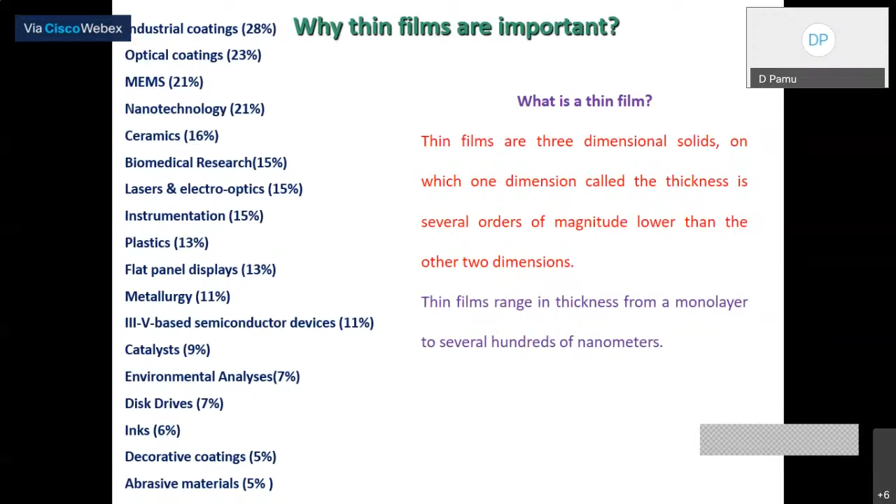So I am just giving the general statistics, the importance of thin film technology being used in various technologies. So that is where this has gotten very much importance. I just want to give generalized applications, and then I will go into the importance of how we deposit thin films, and then if time permits we will also see how to characterize the thin films.

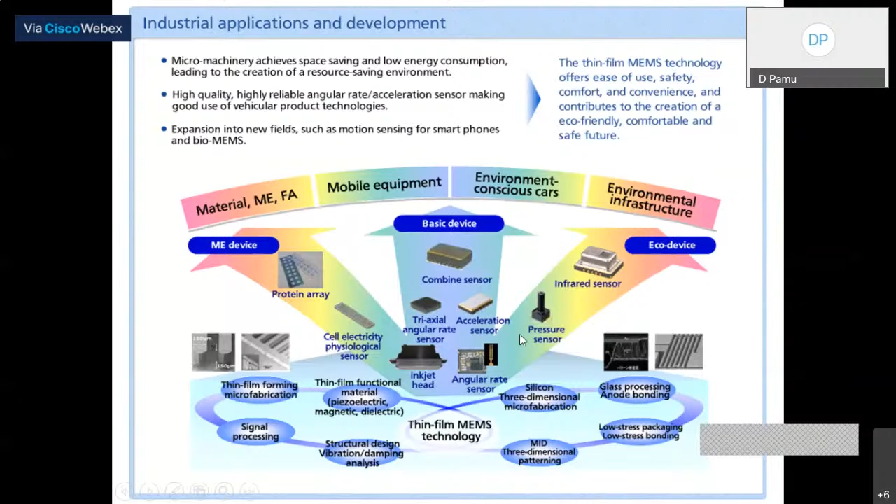So the MEMS structures is one of the smart technologies that is coming up, where the device size is much smaller. In this part, we see that thin films are very much evident in fabricating all the applications shown on the screen.

We know that in every part of an electronic device, whether it is packaging or smaller size devices which are very much compatible with the semiconductor industry, that is where these thin films are very much used in the technological aspect.

Even layers and all this, in every case we see a thin layer of it. Sometimes you may not directly deposit a film, but you will slice a thin layer of plastic and put it up. That is the commercial application of it.

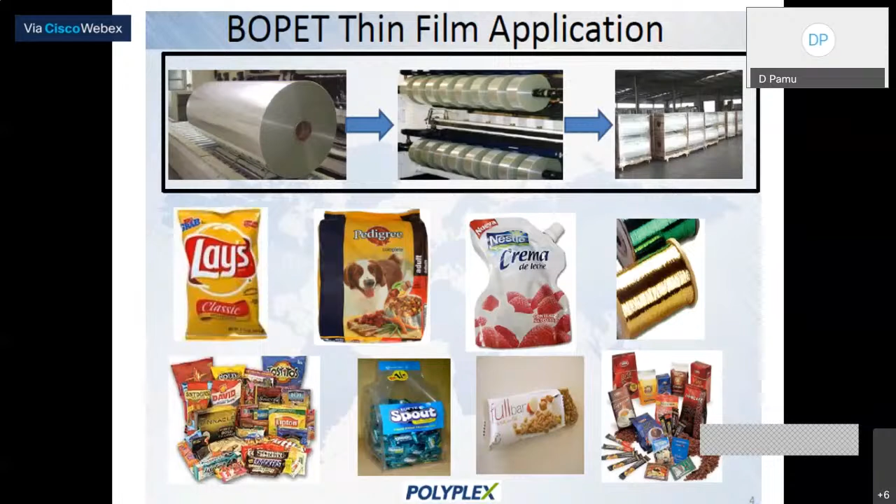And then we will also move on. In the aeronautical industry, or whether turbines or telecommunications, we see that thin film technology is very vital. Why it is vital is that it is very easy to protect the device from environmental aspects, which is not possible with most of the other nanotechnological methods and nanomaterial synthesis methods that we use.

Now we know that even companies started transparent screen TVs, where when you switch on the TV only, you will see the screen, otherwise it is transparent. Why that is happening is that this is again transparent oxides being used, and the coatings where you will see 100% transmittance of the light.

And now we are moving on to flexible devices, where again a thin layer of the material that we are interested in is deposited on the device and we are able to use it effectively. So these are some of the applications, and we know various aspects of it are coming.

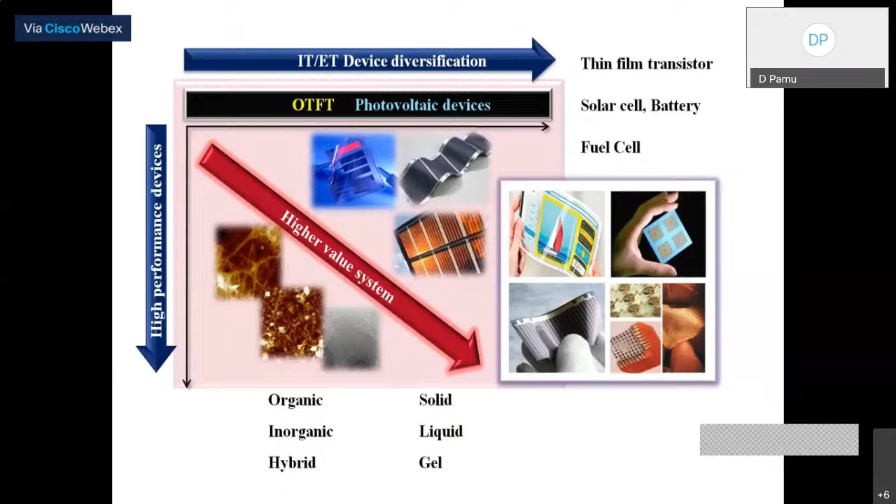This is one example of that, and again you can have MEMS structures on different flexible substrates, so that it is not rigid, but you will be able to tune or bend the device according to your requirement. This will allow the thin film, because the thickness is so small, to not distort the structure of the material itself. So that is the advantage that we have.

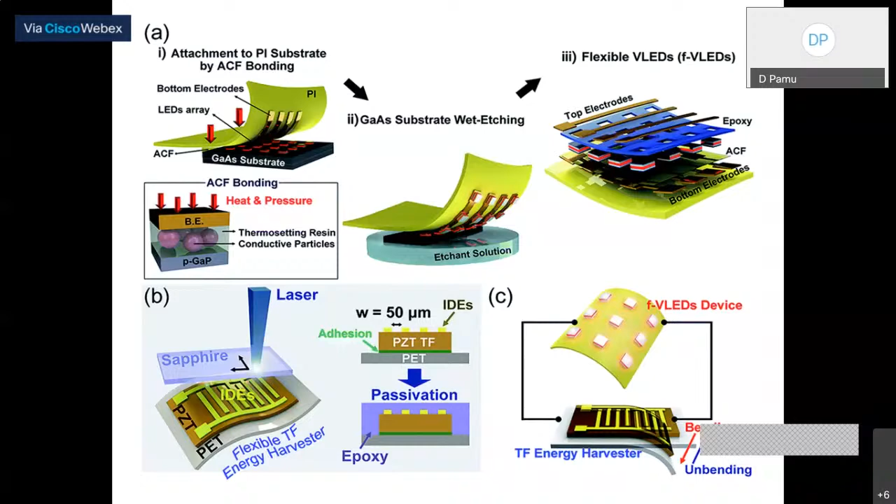We also know that solar panels and all that can be made even lighter, so the entire house can be covered. In Kerala and other places they build with solar panels, so that you don't need extra electricity connections. That is possible because these solar panels have become very thin due to thin film technology.

This is mostly due to electronic devices such as mobiles or tablets and other electronic computer devices. Due to that, thin film technology has gone up so much.

So these are the applications. But how do I do thin films? The industry seems very promising, but how do I do a thin film? How do I deposit a thin film? What is the method that we follow? That is what we are going to see from now on.

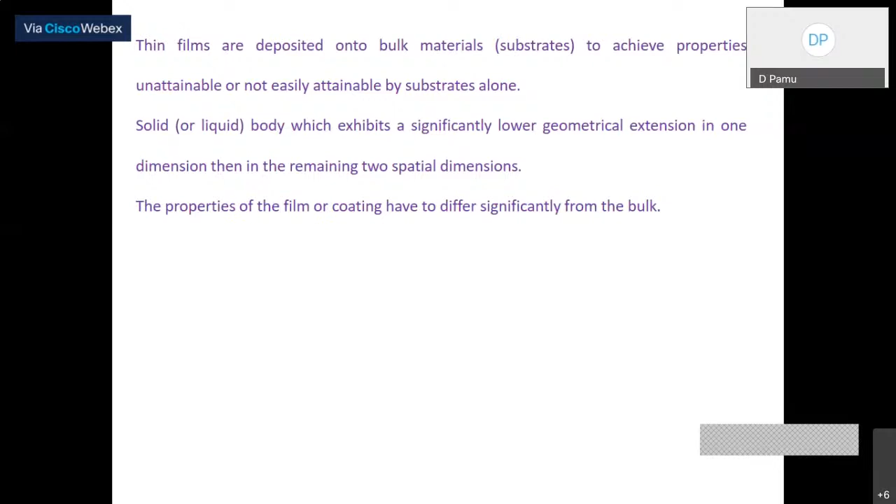So now what we are basically going to do is a layer by layer process, and initially you vaporize it and again condense it onto a substrate. That is what happens in the case of physical vapor deposition. Anyway, I will come to that.

As we move on, you will be able to distinguish between a thin film and a thick film. As I told you, for somebody thin is very thin, for somebody thick is very thick. So whatever is your need, you have to choose.

So why we call thin films is that a film is considered thin when its properties are significantly different from its bulk. Why is it so? Because of the large surface to volume ratio, that is the main thing. That is what probably yesterday also you would have heard when we were talking about nanotechnology.

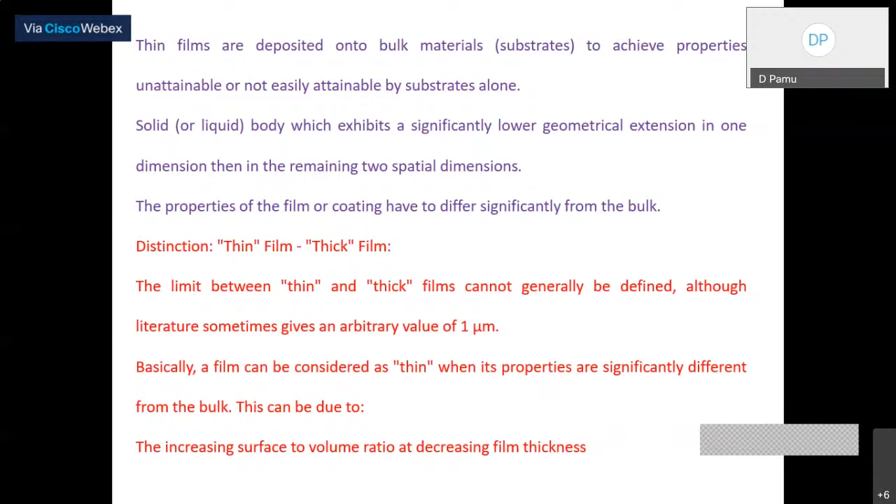In the gaseous state, we have methods called CVD, that is chemical vapor deposition technology, PVD, physical vapor deposition technology, and IBAD, ion beam assisted deposition. In this case, what happens is initially you start with the solid and vaporize it, then bring it to the substrate and condense it. That is what is called the gaseous state method.

Solution state method means that sol-gel process is one of the best examples. That means you make a solution of the material that you want to deposit on a particular surface, and then you dip your substrate, or you put a layer of it. That is called the solution method.

And molten or semi-molten is thermal spraying, welding, of course laser welding. All these come under the semi-molten state or molten state techniques.

But however, today my interest will be more on the gaseous state, because this is precisely required for various applications. I am not underestimating the other techniques, because my focus and my expertise is only on PVD or the gaseous state methods. However, solution based methods are also equally important when you start working on it.

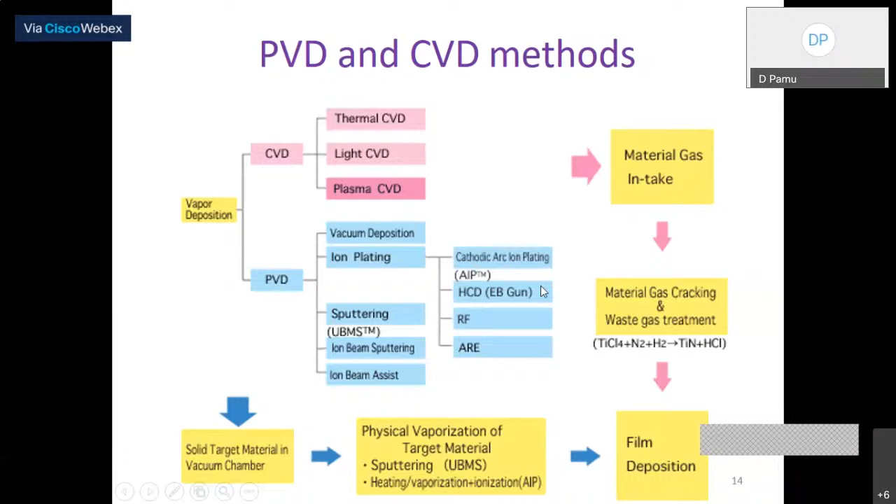Of course, I will also enhance further. Let me distinguish, this is the crucial slide, and based on this, later I will go a bit in a diverse way. So what are the factors that distinguish PVD and CVD?

Reliance on solid or molten sources, as opposed to generally gaseous precursors in CVD. So what happens is you totally depend on the volatile components in CVD. Physical mechanisms like evaporation, collision, impact, by which source atoms enter into the gas phase, that is what happens in PVD.

A reduced pressure environment through which the gaseous species are transported, this is different from CVD. That's where PVD has a different advantage than CVD.

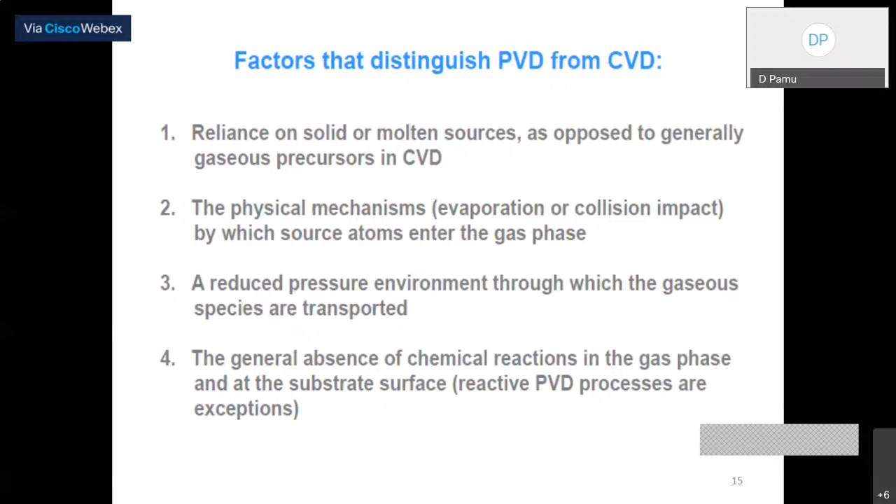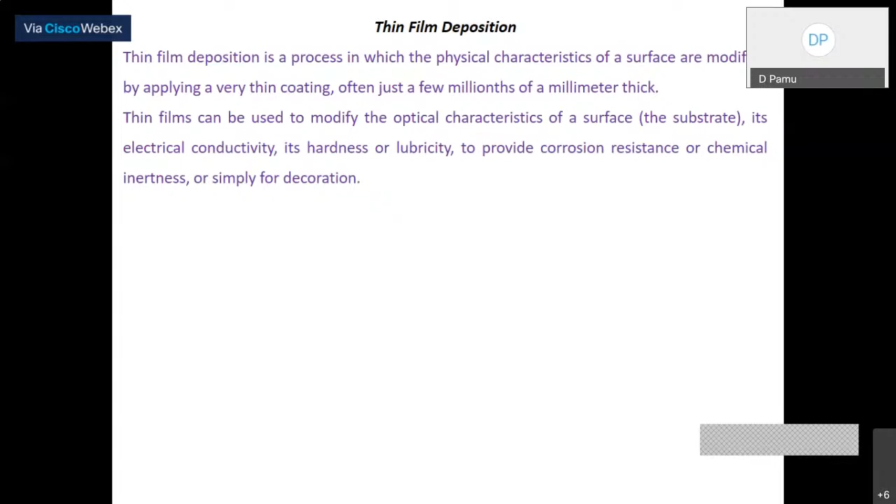So now when we are talking about thin film deposition, it's about physical characteristics. What you are basically doing is the surface is modified by applying a very thin coating, often just a few millionths of a millimeter thick, or a few angstroms, or a few nanometers. Of course, they are used in various applications, as I already discussed.

So in order to produce such thin films, the deposit must be applied in a very controlled manner, this is what is important. Sometimes what we need to do is have an atomic monolayer, that means one thin layer of the material that you are expecting, which needs a clean substrate. For that, again, you need to have a vacuum.

That is what, so when I am talking about PVD, physical vapor deposition methods, vacuum is a must component, because unless you have a vacuum, you will not have a clean surface in the conditions, which will not allow you.

Otherwise, you will not have a good qualitative thin film if you don't have a vacuum. But in the case of CVD, one advantage is that PVD requires capital investments, whereas CVD does not. If you can make minor changes in the quartz tube and add a heater inside, and if you can place your substrate and allow the precursors to go into the quartz tube, you will be able to do the experiments. Whereas PVD requires some initial equipment like a vacuum system, power supply, cathode, all that is required. So that is where I am giving some more introduction to CVD.

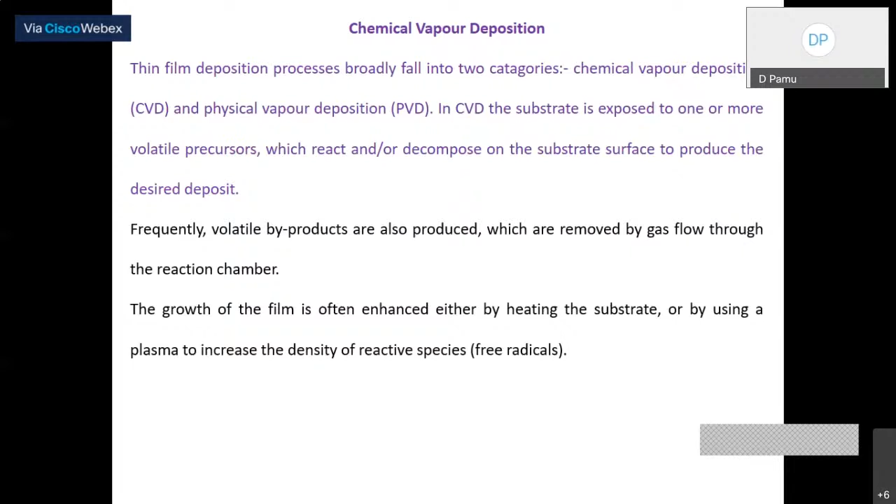So it is somewhat different from a solution-based method, but you start with solutions or gases and finally you end up with a solid in the case of CVD. The growth of film is often enhanced either by heating the substrate or by using plasma. So you can also use plasma, because sometimes you have to use plasma enhanced CVD. Maybe I will give a small example of it as we move on. So in some cases, both are used.

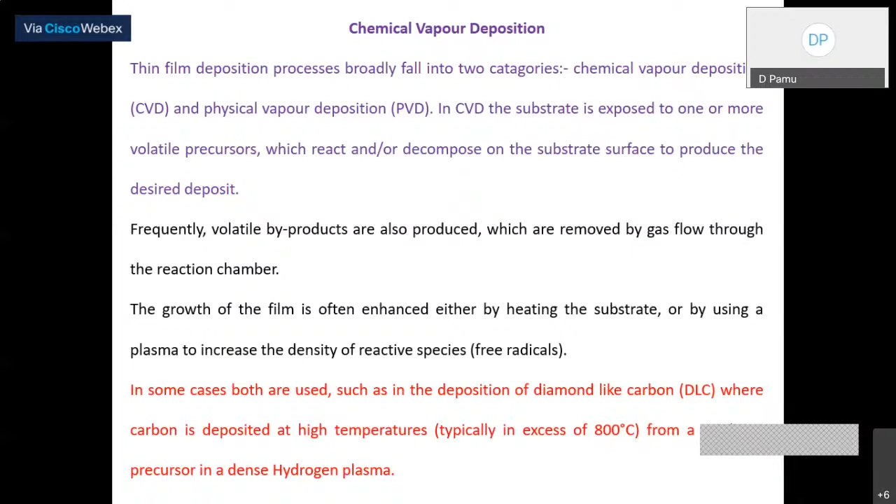That means you will heat the substrate and have some chemical reaction happen, or at the same time you will also use plasma to break the bonds between the organic molecules that you take inside. In CVD, most of the time you will use volatile components for the reaction to happen. But whereas in PVD, you will not use any volatile, you will use solid vapors. So that is the main difference that I am just telling.

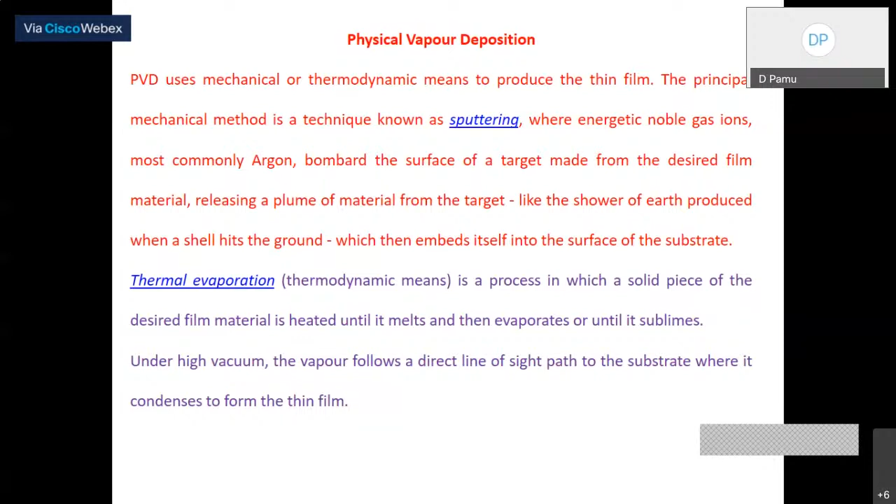So when we come to PVD, physical vapor deposition method, there are a few methods. I will just introduce each of them for maybe a couple of minutes and explain their principles, which are very general, common methods required for deposition. And similarly, for CVD also I will do the same thing. Okay, so there are a few fundamental steps in thin film deposition. I just want to explain that.

So in physical vapor deposition, vapor phase generation from a coating material is the first part. That means, suppose if I want to evaporate silver, I need to heat the silver on a filament resistively, so that the silver will go to the gaseous phase.

That is what happens. So now that gaseous phase, the transfer of vapor phase from the source to substrate, how will you do that? Due to the line of sight. That means in the vacuum, because when you have a vacuum inside the chamber, the mean free path is very high. It is not necessarily that the entire deposition will be on the substrate alone, but you will have deposition on the walls of the container also.

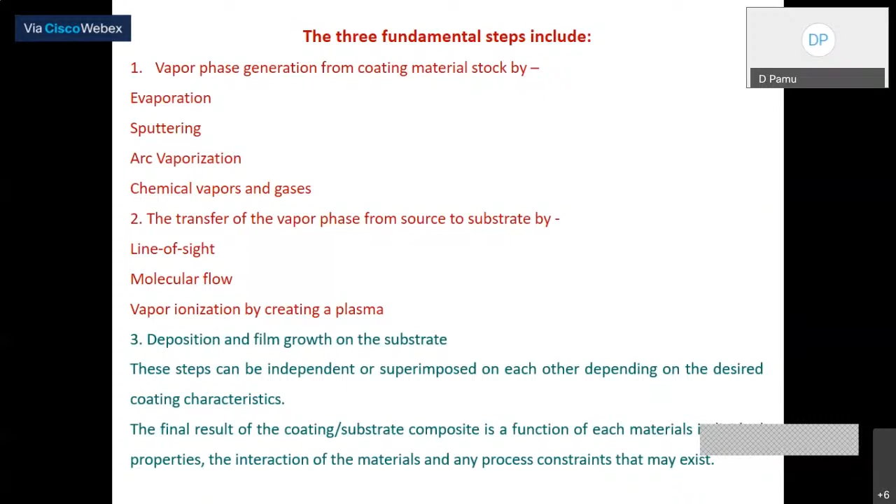And the third one is the deposition and growth of the film on the substrate. So what happens is when these vapor molecules are condensed on the substrate, layer by layer, when you do a slow rate of evaporation, you will have a layer growth, which ultimately results in the deposition of your thin film. So these are the three fundamental steps involved in physical vapor deposition, which I am going to discuss, introducing a couple of methods in PVD and a couple of methods in CVD also. Okay, this is what happens.

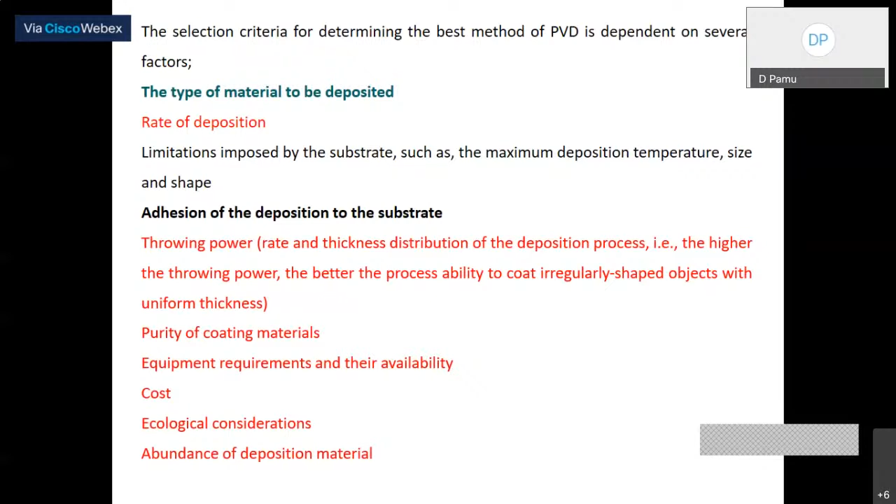So this is enough to introduce thin film. Of course, there are various methods. If you want a qualitative thin film, you have to have a pure initial material. That is the important thing. So this one I will not discuss; maybe you can go through the literature so you will be able to understand. So now that is a brief introduction to PVD. Then let me also introduce a little bit about CVD and a few methods of CVD, and then I'll go to a few methods of CVD as well as PVD.

So as I told you, in CVD everything happens on the substrate. Substrate is the core in the case of CVD. Now when we talk about CVD, there are large varieties of methods possible.

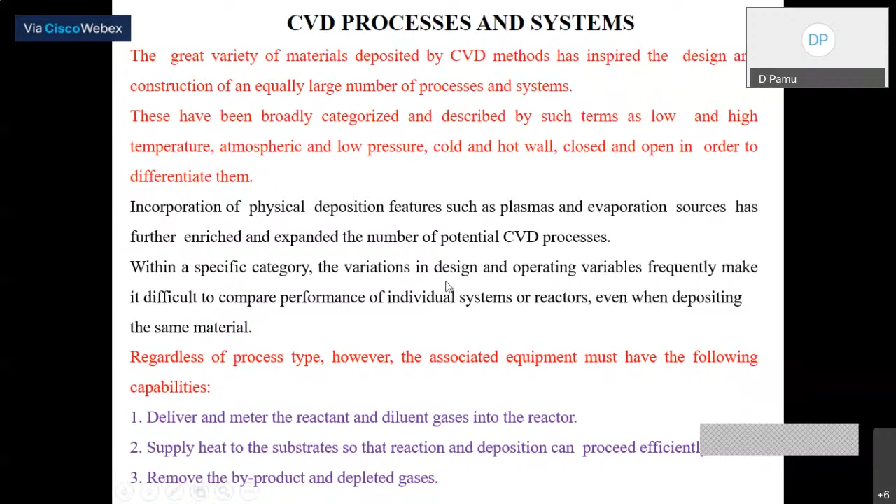You can have low pressure, high temperature, atmospheric, cold wall, hot wall, closed and open - varieties of CVD methods are possible. First I want to discuss CVD only, because it is easy to set up. So what are the types? What is exactly happening in CVD?

These are the three steps I am putting up here. First, you will deliver and meter the reactant and diluent gases into the reactor. That means, suppose if I want to do a silicon deposition, I will start with the gaseous form of the various silicon based volatile components into the reactor. Then you supply heat to the substrate so that reaction and deposition can proceed efficiently. So when I send the volatile gases onto the substrate and heat my substrate...

...then once the reaction took place on the substrate, there are unwanted gases. Byproducts are always there in the case of PVD and CVD. Why? Because you have to decompose the components, and one component you will use and other components you don't need. So those waste products, you have to send them off. That is what happens in the third step.

So in the case of PVD, what you will do is vaporize the material, bring it to gaseous form, and condense it onto the substrate. That is the method core theme, the basics of PVD.

In CVD, you will allow the reactant gases into the chamber first. You cannot allow the gases just like that, but you have to allow them in a controlled manner, then heat the substrate so that the gases will break into different components, and one of the components will deposit onto the substrate. Whatever byproducts are there, you will remove. So these are the main fundamental differences between PVD and CVD.

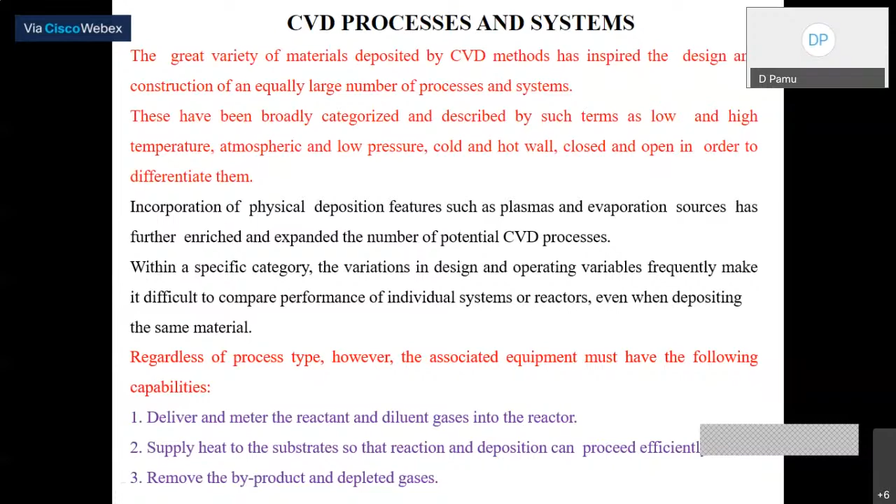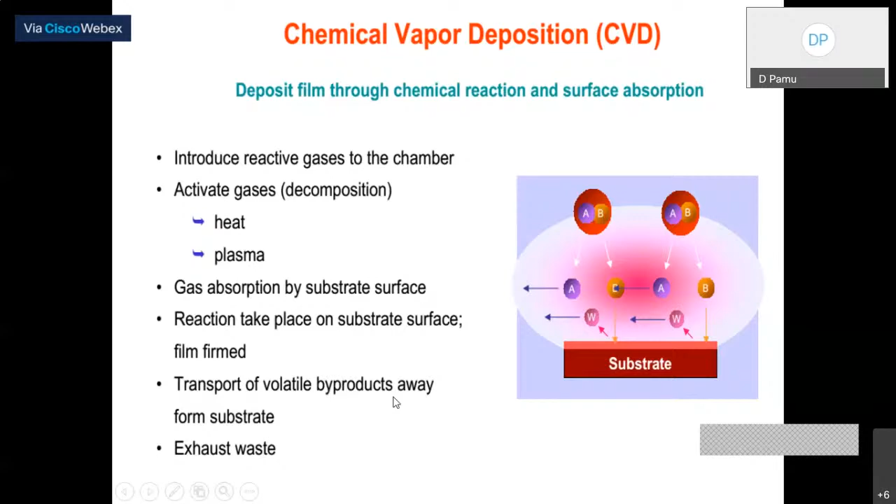And the rest is what happens here - this is what I told you in the previous case, I am just putting it here. So introduce the reactive gases to the chamber and activate them - that means to activate gases you need to decompose them, either using heat or plasma. Then gas absorption by the substrate, reaction takes place on the surface and the film is formed here, this pink form, and then transport the volatile products outside, and whatever is the waste, you take them up. That is what CVD is.

So in CVD you have different types - APCVD is the atmospheric pressure CVD. The basic physics principle in this case is the mass transport limited region. You will have fast deposition and poor step coverage - that means the control is less here.

And LPCVD is the low pressure CVD here - the reaction, surface reaction rate is limited. So in APCVD you have mass transport limited, whereas in LPCVD you have surface reaction limited. So excellent purity and uniformity because you have low pressure, but in the top case it is atmospheric pressure - that's where you will have a difference.

Here you will have a low rate of deposition because you are working at low pressure - you cannot send ingredients much faster into the chamber. That is where you will have good control here. It requires a vacuum system - as I told you, even if you want to have a pressure, you have to have a vacuum system. So you can have a cold wall reaction chamber or a hot wall, whatever it is.

In cold wall, what happens? No reaction on the wall will take place, only on the substrate. But the temperature control will sometimes be difficult. Hot wall will have particle contamination occurring on the surface, so you have to clean it regularly. That is the basic methods in...

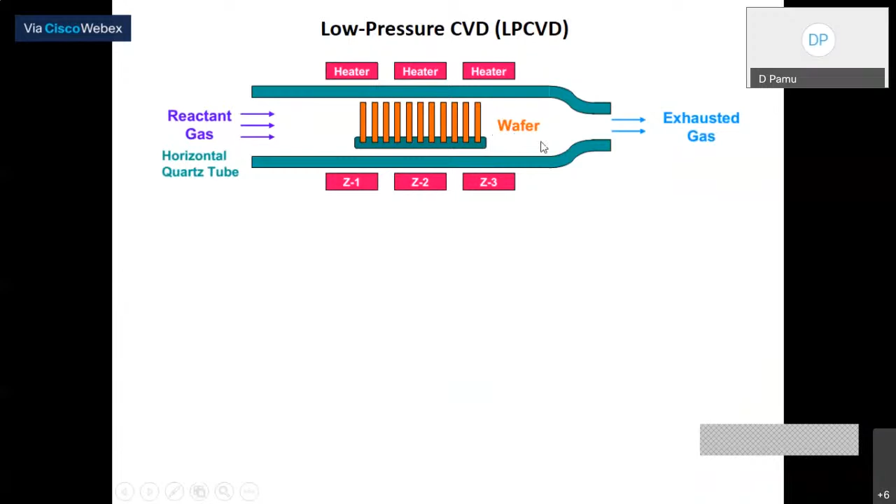So the reaction takes place here, and then the gas goes out from the chamber. So these are the advantages and disadvantages with the LPCVD.

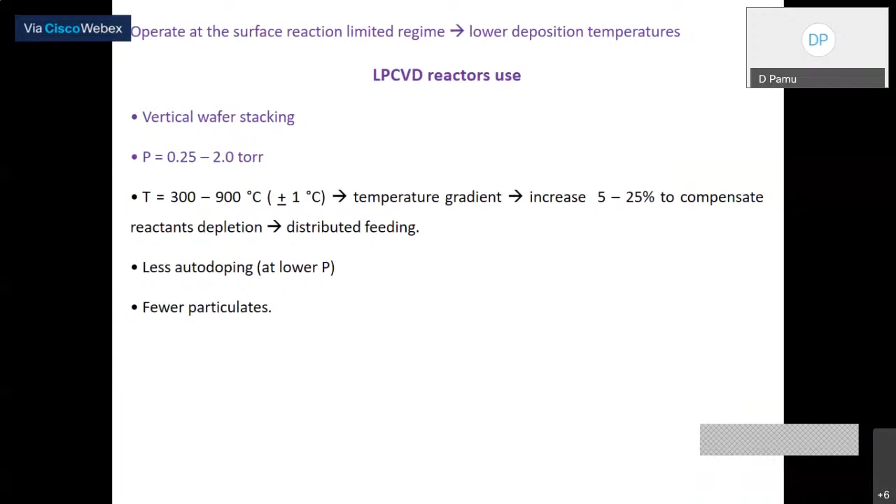If you want to start a chemical vapor deposition, you can have a rotary pump which costs about 50,000, a good quartz tube, and a heater will cost you another 25,000. So in 75,000 you will be able to start a thin film deposition method, at least with a CVD, with good quality, where you will be able to publish good data and make a good product. That is where I started with CVD initially.

Of course, line of sight means depending on your vacuum level it will happen, and poor step coverage also - how much vacuum is there, based on that you will have that.

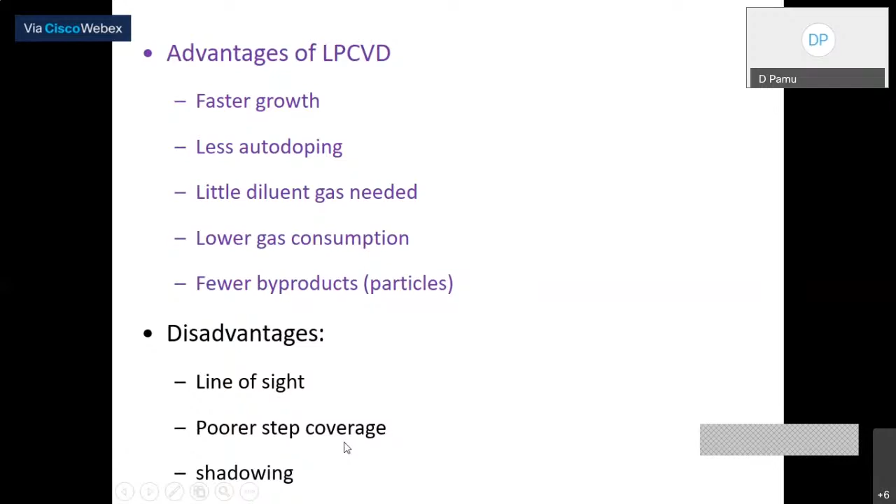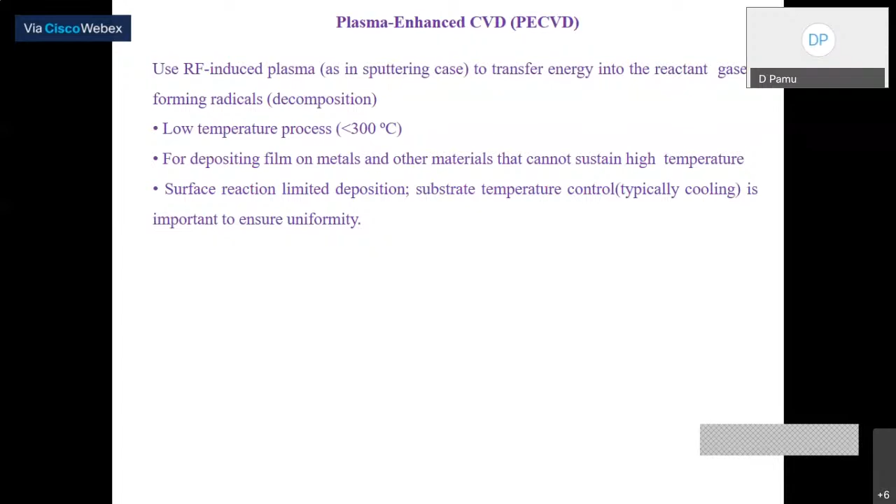Another method is the plasma enhanced CVD. Instead of heating everything, sometimes you can use plasma to break the bonds between the molecules. That is what happens here. The gases are coming inside the chamber, and what you are doing is breaking the constituents into different parts, using the RF signal plasma to break the bonds. That way you will have a very qualitative deposition possible.

Sometimes what happens is you will not be able to go to very high temperatures because some components are very volatile. Even though we can go to very high temperatures, the problem is that your byproducts will be more sometimes. So sometimes we may have to grow amorphous thin films, meaning the temperature has to be as low as possible. That way the plasma enhanced CVD method is a very promising method.

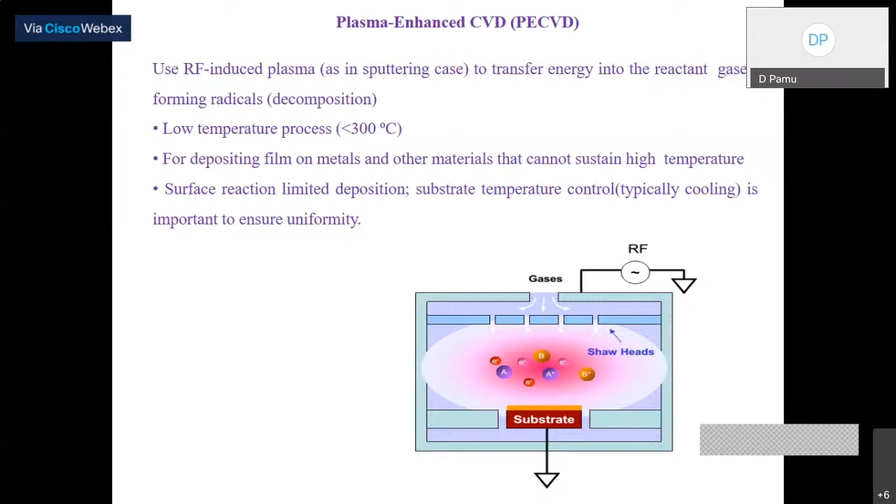So this is all about plasma enhanced CVD. So, let me move on.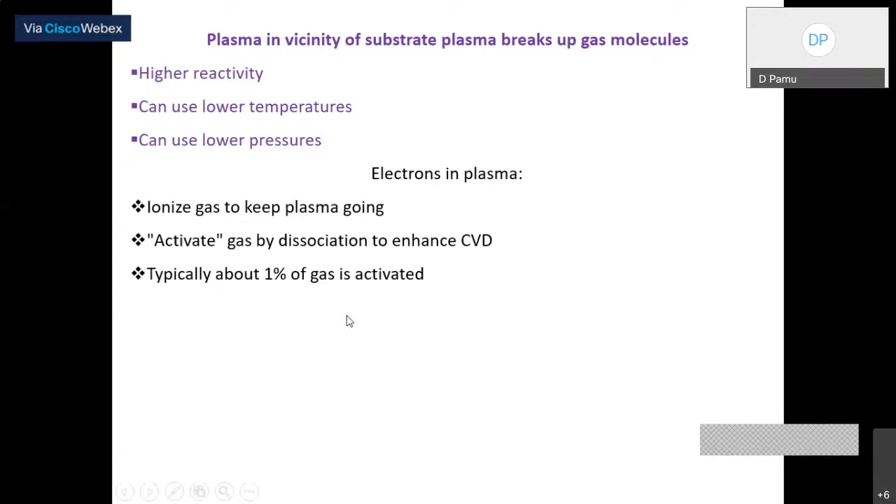What is exactly happening in the plasma? Electrons in the plasma ionize the gas to keep plasma going. The electrons in the plasma break and ionize, and then activate gases by dissociation to enhance the CVD, meaning they break the bonds so that the reaction takes place. Typically 1% of gas is activated, so that's where you minimize a lot of wastage in plasma enhanced CVD. That is one advantage of it.

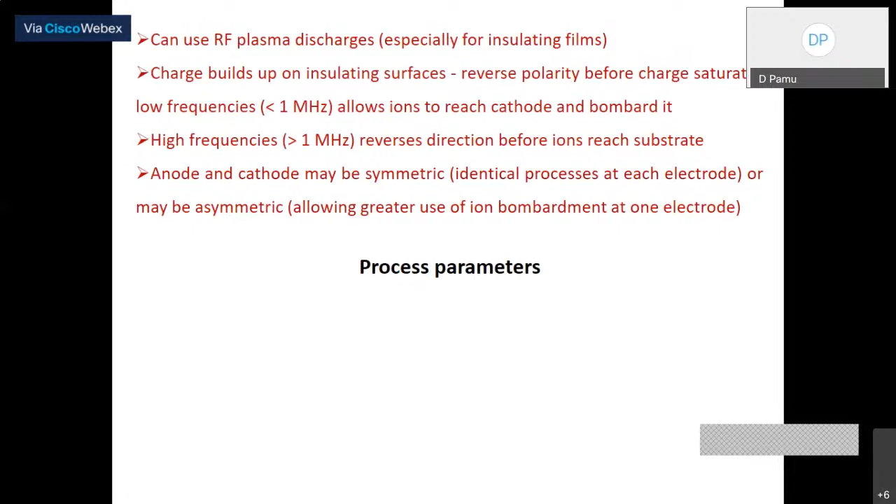Of course, I have given some more details, you can work on it. So what are the process parameters in this CVD?

Substrate temperature - how much substrate temperature is very important. If you have a higher substrate temperature, the reaction rate will be faster. So sometimes you may have to have moderate temperatures, in that case you have to grow the film very slowly, with very little heating from the PECVD process. That way you will be able to grow the film of your choice.

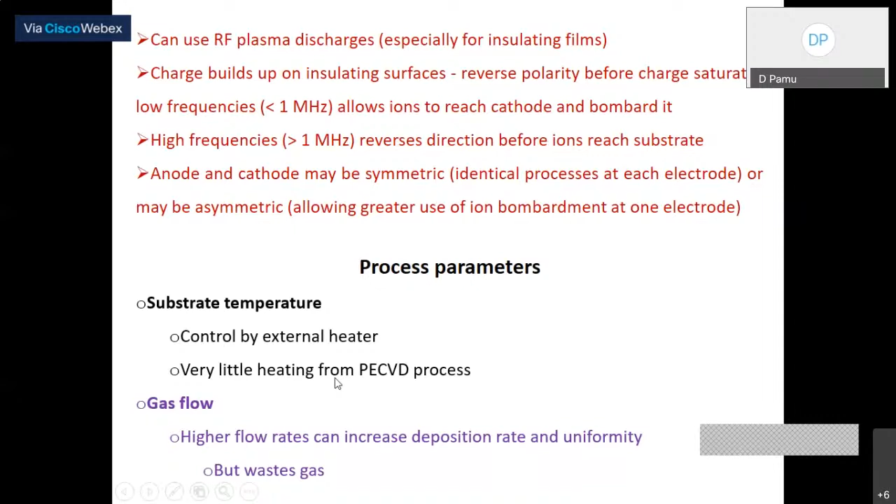Gas flow is one important thing, and as I told you, in CVD you will definitely have waste products, so you have to deal with that carefully. And pressure is another important parameter, and the power - when we are talking about RF power, there also you can have another control.

Surface area - whatever surface area you want to deposit in CVD, that much area you will be able to deposit, provided you have the heater under the substrate. Suppose if I want to have a film on a 5-inch disc, my heater also has to be 5-inch, so that I will have a thin film deposition entirely on the 5-inch substrate. That is what happens.

So you can also do a laser enhanced CVD. Instead of using plasma as in the previous case, you can use a laser too - these are very sophisticated methods. When I use a laser, two types of reactions are possible. One is called pyrolytic, which heats the substrate to enhance the reaction - meaning I send the laser beam to heat my substrate rather than physically heating with a resistive or some other method.

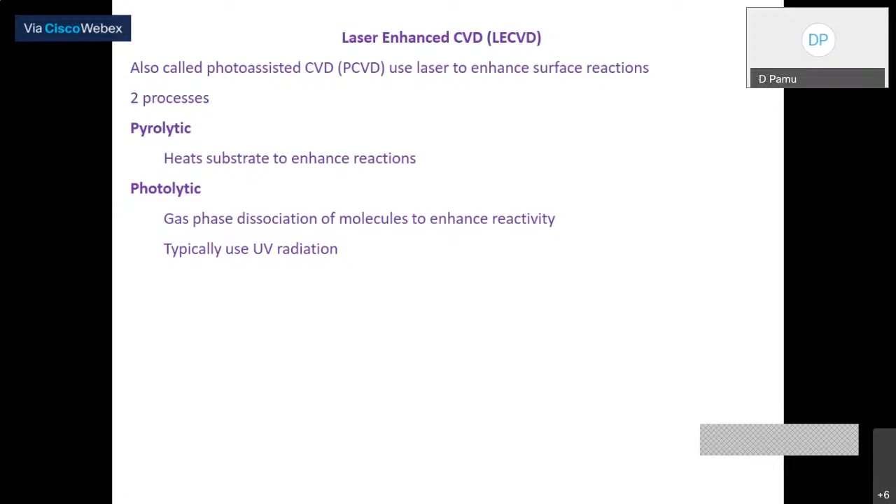Another is the photolytic. Since laser is light, with that light itself you will be able to break the bonds and help the reaction take place on the substrate. So either of them you are able to do. In the pyrolytic case, the laser beam comes in, breaks the bonds, and your heated substrate is here where the film forms. Whereas in photolytic, you focus the beam onto the components, and ultimately you deposit the thin film.

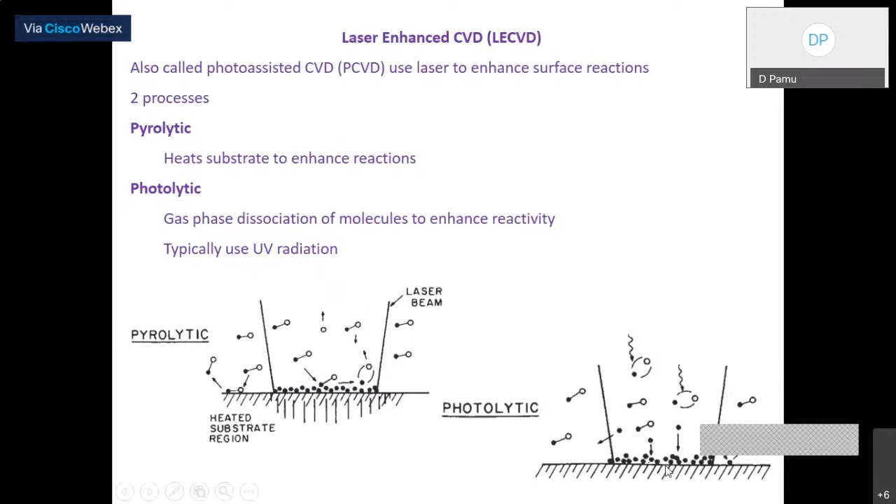That is LECVD. MOCVD is another important and well-known technique. MOCVD generally uses organometallic source gases. The best example is depositing gallium - you start with trimethyl gallium, and ultimately the trimethyl group comes off, leaving only gallium. The advantage is that organometallic components are volatile at relatively low temperatures and can be broken down at lower temperatures. However, carbon contamination is a small disadvantage, but you can overcome that. So that is all about CVD.

Let me summarize CVD. I start with volatile components and allow them to come onto a substrate, underneath which I have a heater. Because of that thermal heat, the bonds of the volatile components break, and you get a thin film on the substrate. Byproducts are formed and you take them out. That is the CVD methodology.

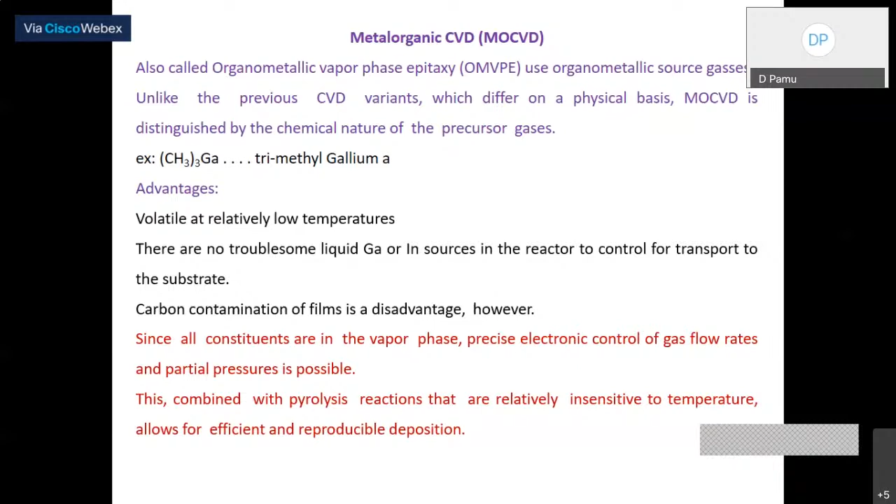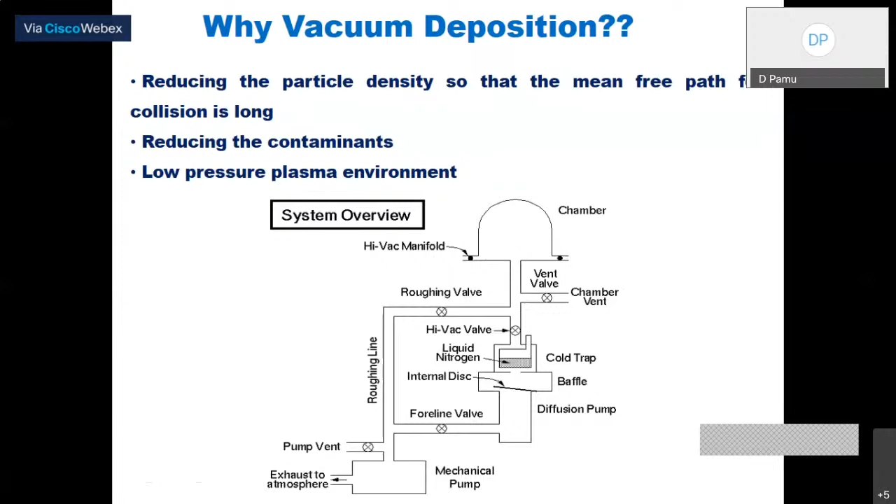Now let me move on to PVD. If I want to start with PVD, physical vapor deposition, I need a vacuum. Why? Because if I do any reaction in atmosphere, there will be many possible contaminations. So we reduce contamination, and to create plasma, low pressure is good so you can send enough reactive gases inside the chamber. That is where vacuum is very much needed in PVD - the vacuum part is a must.

So ultimately what happens, in a reasonably high vacuum, the material atoms fly to the target. That means they come to the top and stick onto the surface. The source material is coated onto the target surface. So what are the steps involved here?

So the source material, I start with aluminum, and I make aluminum vapor. I bring aluminum to a gaseous state, and allow those gaseous molecules to fall onto the substrate. Suppose I want to coat a copper plate, I will keep the copper plate on top, so that the aluminum molecules go and sit onto the copper substrate and deposit the atoms. Ultimately it becomes a solid after some time. This is what happens in the case of PVD.

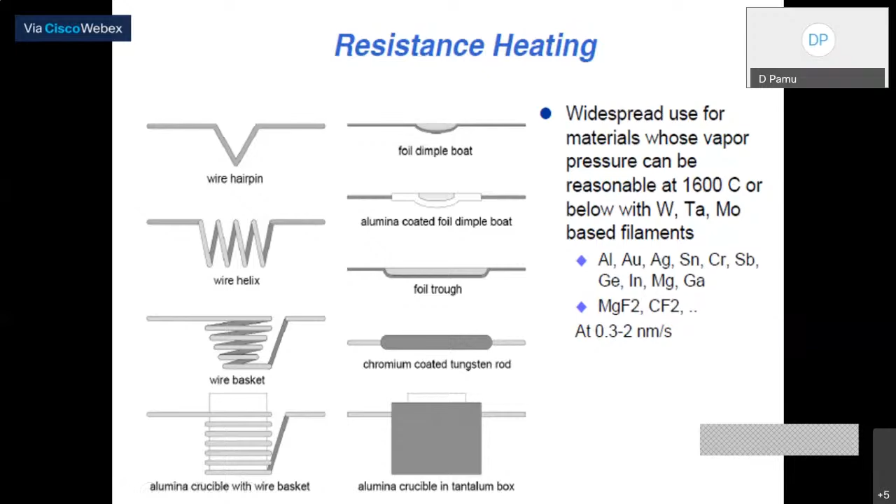But in thermal evaporation, there is a problem. When I put my material here, the material will get contaminated with the filament - some of the impurities of the filament also may come onto the thin film, which will contaminate and reduce the quality of my film.

To avoid that, we will go for e-beam evaporation, electron beam evaporation. There is one more disadvantage in PVD - suppose the melting point of a material is very high, say if I want to evaporate platinum or titanium, which requires a melting temperature of about 3000 degrees C, that is practically impossible in physical vapor deposition. So if I want high melting point materials with less contamination in my thin film, then I will go for e-beam.

Also, if I want to deposit one layer of aluminum, another layer of TiO2, then another layer of silver or copper or gold, in the same chamber, all I need to do is divert the electron beam into that. So what is exactly happening in the e-beam?

A focused beam of electrons is used to locally heat the source. I have a crucible here, and underneath that I have water cooling, so that at the bottom the crucible does not get heated up, and there is no reaction between the crucible and the powder. So you will have only pure material to be deposited, and can use it to heat and evaporate even high melting point materials.

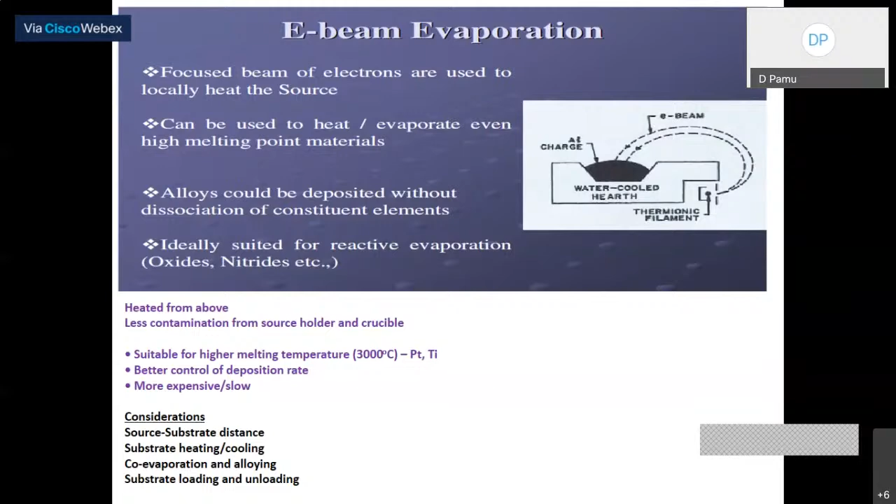So this is a summary of what happens: there is a cathode filament which generates the electrons, and using an aperture, you make them into a beam. And if you use a magnetic field, you will be able to tilt the beam the way you want.

You see that here the electron beam is tilted and guided. So I can have one more evaporant here, one evaporant here. If required, I can have two more evaporants, so that if I want to do even multi-layer thin films, it is very much possible with electron beam evaporation.

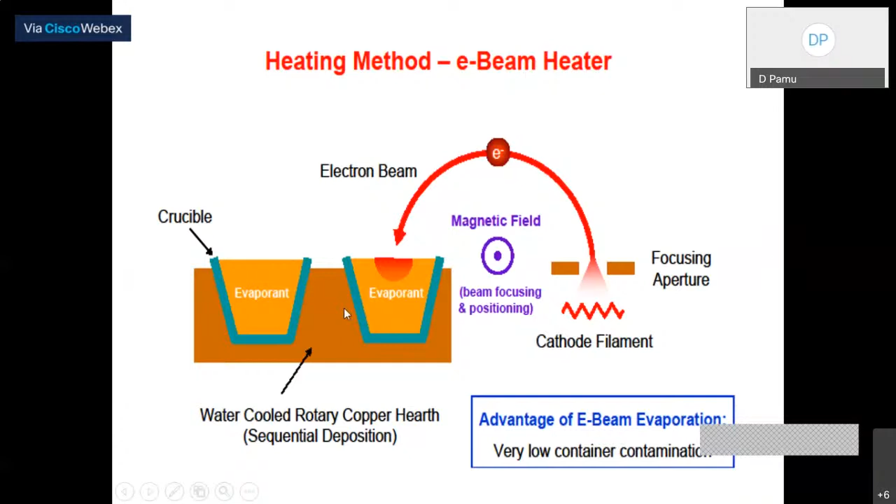Another method is called glow discharge and plasma, as I told you, plasma enhanced CVD also. Let me clearly discuss sputtering. What is sputtering? Maybe with a diagram I will explain. You may go through these lecture notes very clearly.

I have just shown here. This is the outer layer, the dotted line is my vacuum chamber, and this is my target. Suppose if I want to have a TiO2 thin film, this is TiO2, this is my titanium target, suppose I say, and this is my substrate. Here I want the titanium atoms to be deposited.

So now how do I create a plasma? This is my target, my anode, which is at negative potential, and this is my cathode. If I apply a potential difference between these two and allow argon gas to come inside, the electrons coming from the anode will interact with the argon gas and get ionized. That means argon molecule will become Ar plus and electron minus.

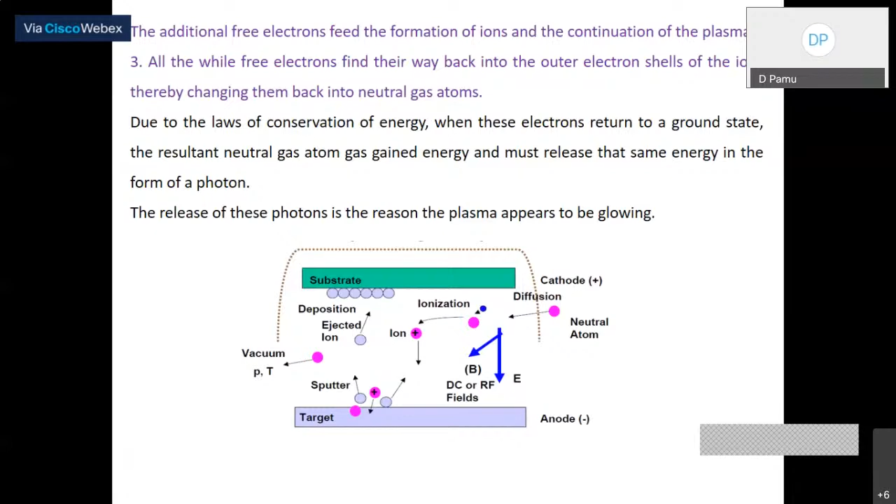This is what is called plasma creation. What is plasma? It is where equal numbers of positive and negative charges exist. That is what you will see, so this is what is plasma. This is what I have just told you, I'm putting it up here so you can read and learn.

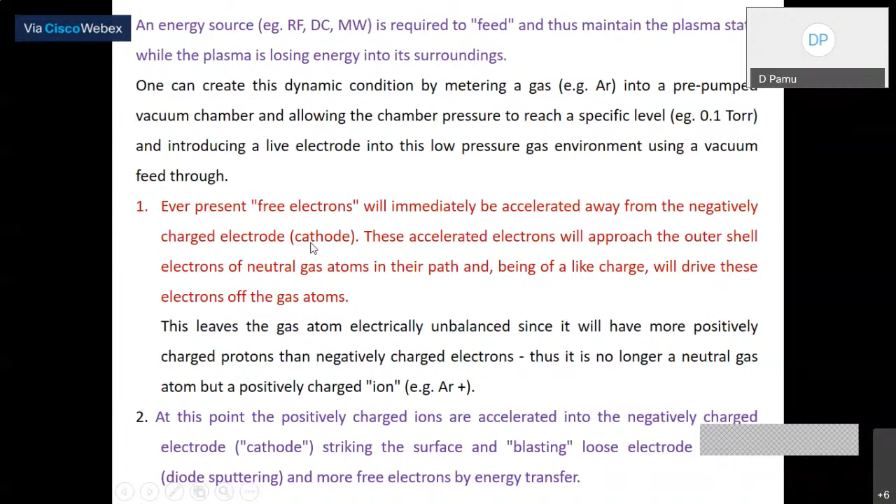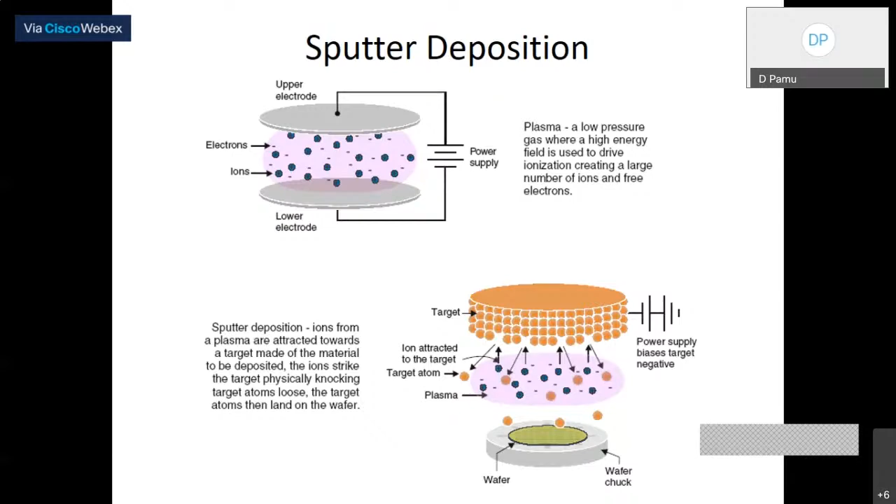So let me explain how the plasma comes up here. I have an anode, my cathode, and anode. Apply the potential and send argon gas. Then these argon Ar plus ions will come to the negative potential and deliver their momentum, releasing the target molecules which will fall onto the substrate. This is the plasma, and this is exactly what is practically happening.

You see here, these red ones are the Ar plus ions, and they give their momentum to the target - suppose this is my titanium target. These red Ar plus ions come and hit it, removing titanium molecules, which deposit onto the substrate. That is the plasma process. You see on the substrate the yellow ones are the titanium molecules falling, and this is the background where ions are created and plasma is continuously happening.

Of course, looking at this, suppose if I have a metal, I do a DC sputtering, meaning I use a direct current source. I can use a DC plasma source because metals have low bonding strength, so a few electron volts of energy is sufficient to release molecules from the metal target. But if I have an insulator, the bonding is very high, you need very high energy to remove one atom from the surface. In that case the DC source will not work and we use an RF signal. So when we use a DC source, we call it DC sputtering, and when I use an RF power source, I call it RF sputtering.

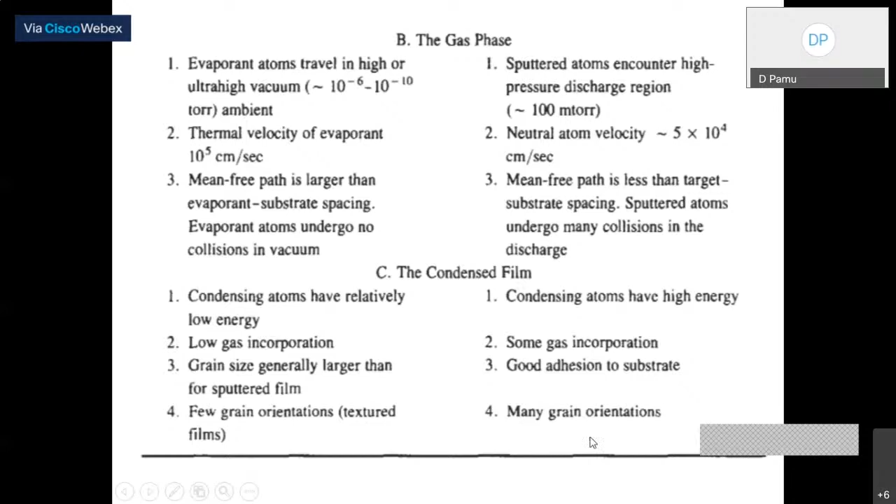Here low gas incorporation occurs because there might not be much gas, but some gas molecules may be incorporated into the thin film, which will not affect growth—if argon is embedded, it's inert and won't affect it; if oxygen, it's already in your film anyway. The grain size here is larger, but here too it can be larger, though sometimes it grows smaller in general. Adhesion, meaning the film attaching to the substrate, is very good here, but not as good in evaporation. Here few grain orientations are possible; in sputtering, many grain orientations are possible.

To put it simply, this is what happens. In evaporation, you have very low energy atoms, but in sputtering, you have high energy atoms. Here you have a high vacuum, so the mean free path is high, but in sputtering the mean free path is low because you are introducing reactive gases into the chamber. You have a large grain size in evaporation, but a small grain size in sputtering. You have fewer grain orientations because the rate of deposition is very slow, but in sputtering it is very high, so you have many orientations. Adhesion, the sticking of the film to the substrate, is poor in evaporation, but very good in sputtering.

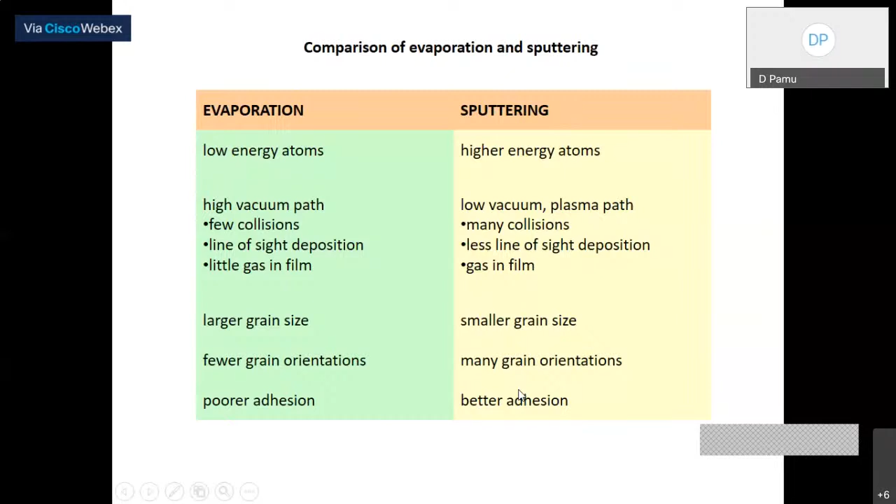So I will move on to the parameters. If I use target power, what happens, all that - probably you can just look at these things, I don't have much time.

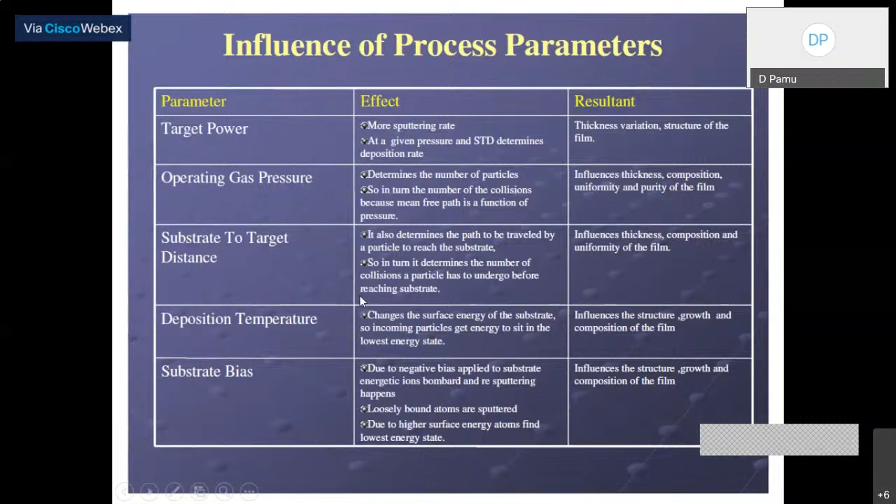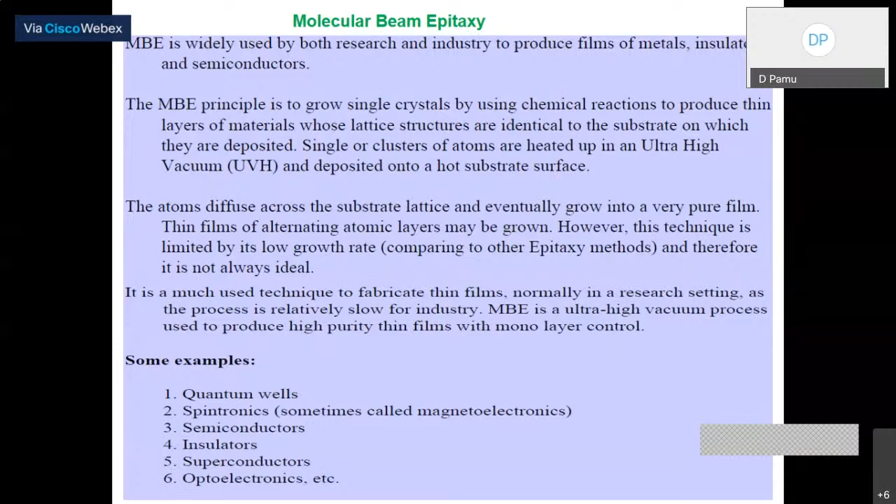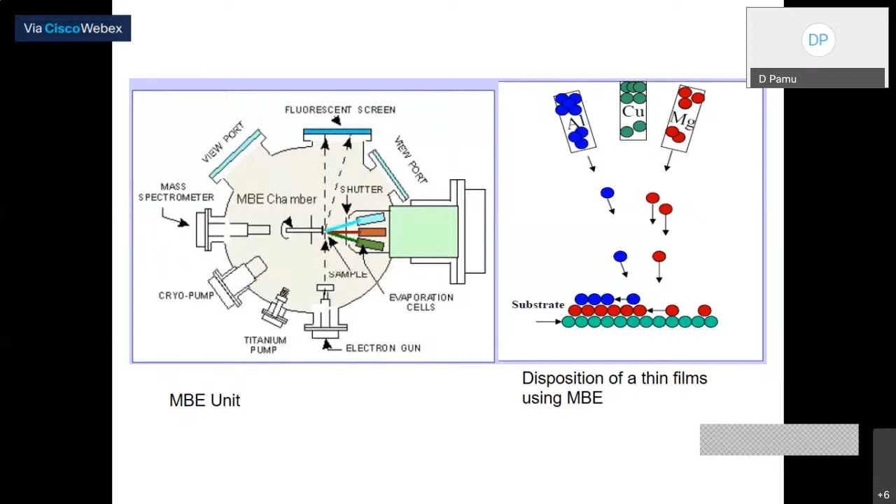See, first I want to have a copper layer, so I have copper atoms. Then I want magnesium atoms to sit on the copper atoms. Then I want aluminum atoms to sit on that. So you will be able to grow one on top of the other nicely - that is what is called epitaxy. You will be able to grow exactly, or between the copper atoms, if I want to have one aluminum atom, I can also have this. That is possible in the molecular beam epitaxy technique, which is a very sophisticated technique used for very precise, controlled devices.

Another one is the pulse laser deposition method, or laser ablation. Why am I saying pulse laser deposition? Suppose I have a material called YBa2Cu3O7, a high temperature superconducting material available so far - this is the 1-2-3-7 component. Suppose there is a slight deficiency in oxygen, it will not behave as a superconductor, rather it will behave as an insulator. So the stoichiometry is very crucial in this component.

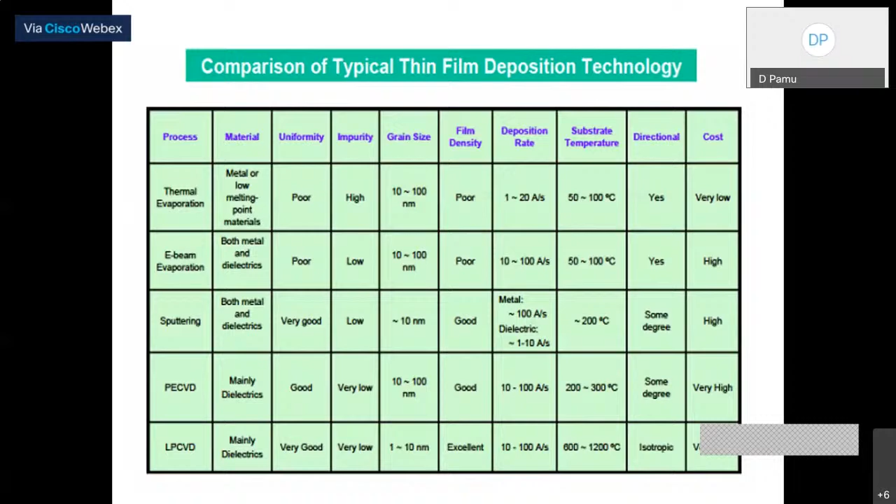But before I go and choose any deposition method, first I need to choose what is my requirement, then accordingly choose your deposition techniques. So this is what I have summarized again, and this is all about your different thin film methods that are possible.

And regarding the characterization, I will not be able to fully talk about characterization techniques, but I will give you a brief summary so that you will be able to choose whichever characterization you need. Let me go to the characterization techniques also.

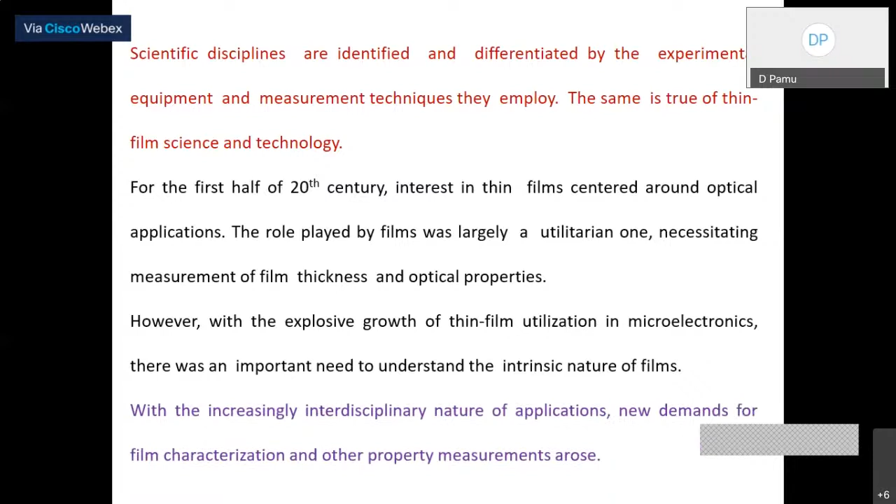Okay, so why we are going to do this: earlier, if you look at it from the physics point of view, most of the characterizations we would only use traditional characterizations like conductivity, all that. But now we are having microelectronics or nanoelectronics where you have to have very precise control over the properties, and you should have complete information of the film, and that is the reason we have to have very precise characterization tools.

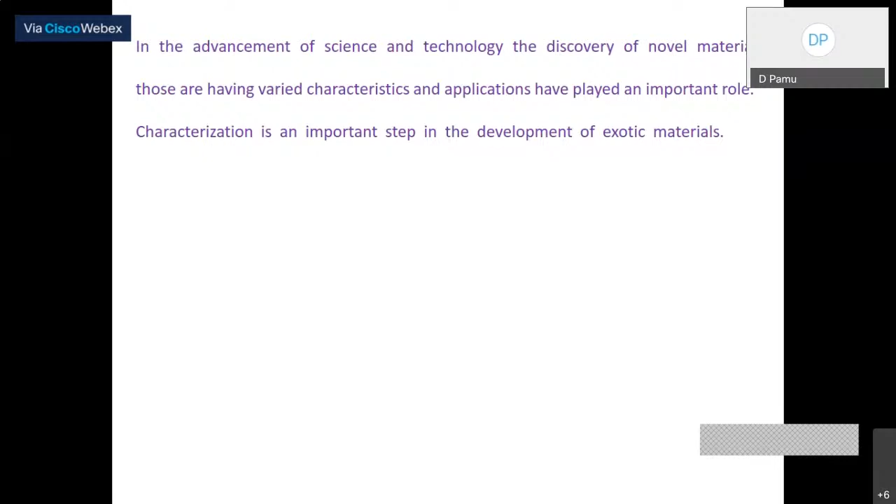In that case, you have to have proper tools to characterize them. Otherwise, thin films people have been depositing right from the beginning of the 20th century. But why could we not have this many smart devices at that time? Because we don't have tools to characterize them. That is the reason we were late. Now, due to this advancement of technology, we have to be very precise in understanding the properties of the material.

So we will see some of them. This is what I want to summarize so that we will be able to understand, suppose, what do you want to know and how do we find out. This is what I will give a summary of. These are the guidelines. I am not going into the detailed characterization techniques, but suppose you want to know what equipment is required. That is what, suppose if you want to know how the sample looks like, how the film surface looks like.

Suppose if you have large particles, if you have a very thick film, you can go to optical microscope. Suppose if your grain size is 2 micron, you can go to optical microscope. But if your grain size is micron size or nanometer size, then you go with SEM or transmission electron microscopy or scanning probe microscopy. So microscopic scale and atomic scale.

So if you want to look at your film at an atomic scale, very thin film, then you go to the scanning probe. Or if it is slightly thick, maybe 100 to 150 nanometers, you can go with the transmission electron microscope. If your film thickness is about 200 nanometers, you can safely go with the scanning electron microscope to understand.

Because why we want to know how the surface looks like. Surface is one of the important things in thin film. The basic important part is the surface, because that is where you have a large surface to volume ratio available. So it is important whether I have triangular particles, spherical particles, or square particles, whatever those things - if you want to know, you have to go with the microscope.

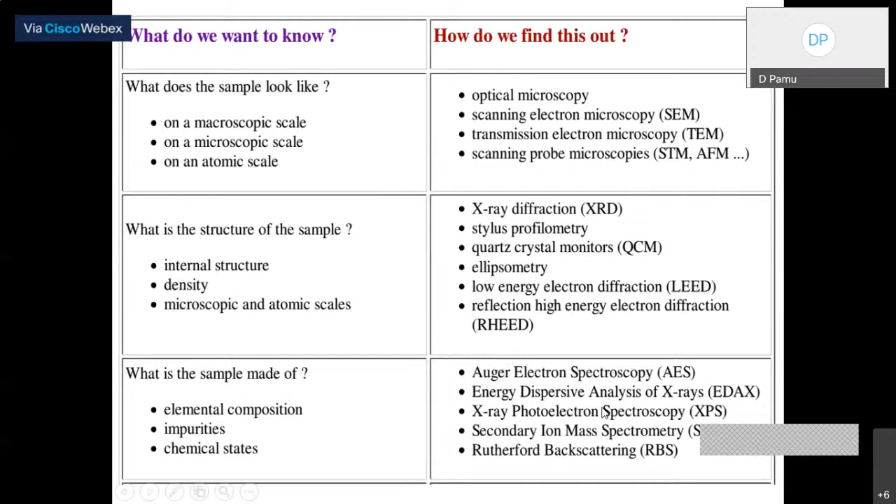Why is a transmittance spectrum possible in the case of oxides? Because these are transparent layers, you will easily get transmittance, and from that you will be able to get the band gap, absorption edge, dielectric properties, and refractive index as a function of wavelength.

If I want to know the electrical properties of my film, I need a capacitor structure - a bottom electrode, the insulating oxide layer, and a top electrode. This way I can measure capacitance, conductance, and resistance as a function of frequency and temperature, to check if the device remains stable when the temperature rises.

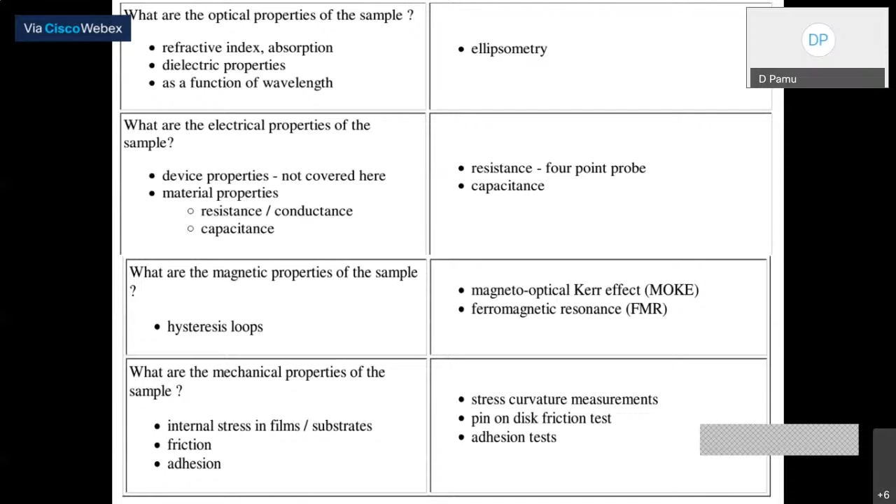Now if I want to know the general fundamentals of characterization, what tools are generally available? Light tools like electromagnetic radiation, such as UV-visible spectrum, or you can use electrons as in XPS, and ions, nuclei, or protons.

These are the available probes used to understand the nature of materials and thin films - and neutrons, neutral atoms. Then touching the samples, the van der Waals forces - that is what you see if you use AFM, where you play with the van der Waals forces between the tip and the substrate to get the microstructure of the film.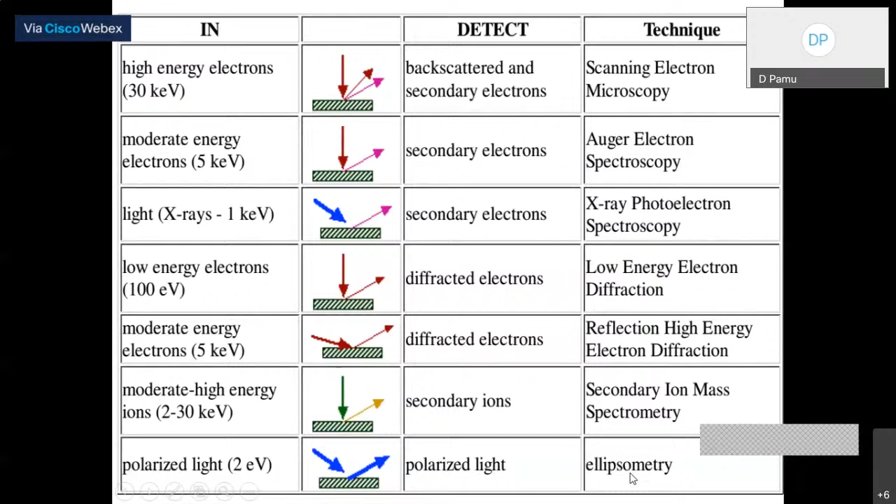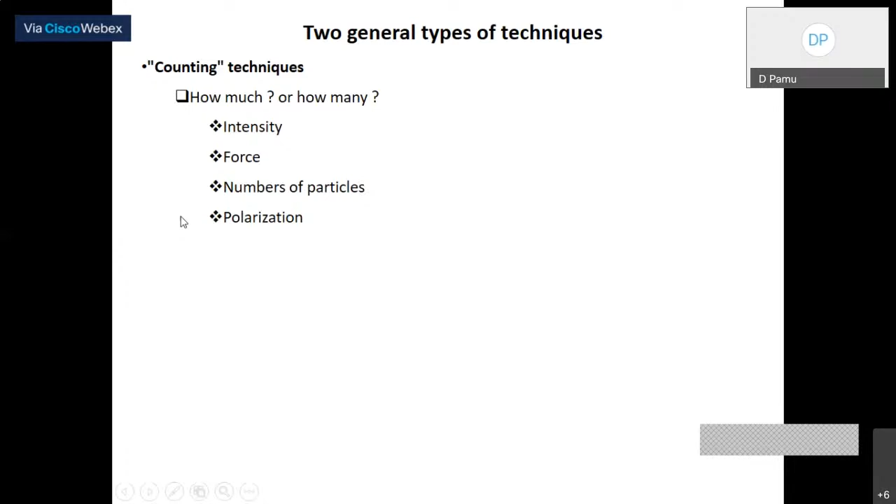In general, there are two types of characterization techniques. One is called counting techniques. For example, in XRD you see 2 theta versus intensity, which represents the number of photons reaching your detector. So it's intensity, force, number of particles, polarization - these we call counting techniques.

Some techniques are spectroscopy techniques - what are those? You get the distribution by energy, wavelength, mass, and position. So we need to choose which one to use. Any light-based techniques are very sensitive, so if you want very sensitive measurements, go with that. Since I don't know your specific need, I'm giving a generalized overview so that based on this information, you will be able to choose your characterization tools.

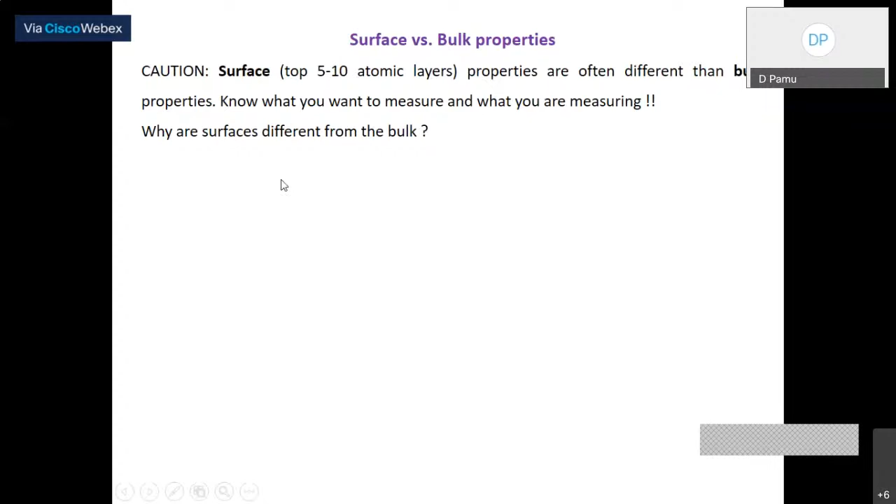Now, why are we doing thin films? In maybe 5 minutes I will try to close here. What is the difference between surface and bulk properties? Thin film technology is very important because at the surface we are dealing with 5 to 10 atomic layers. That is the difference between bulk and thin film, and as a result the properties are very different.

Why? Due to the large surface to volume ratio, the properties of the material increase. This is why the bonding and mechanical properties are different. Surface atoms have no bonds, because in thin film you just have 5 to 10 atomic layers, so the atoms are not bonded to each other properly. As a result, they are free to move, and the moment you subject them to a particular tool, they give an enormous response.

That is the advantage in thin films - we can get surface reconstructions. That means my surface can be modified if I give a high energy tool, meaning the arrangement of atoms is possible.

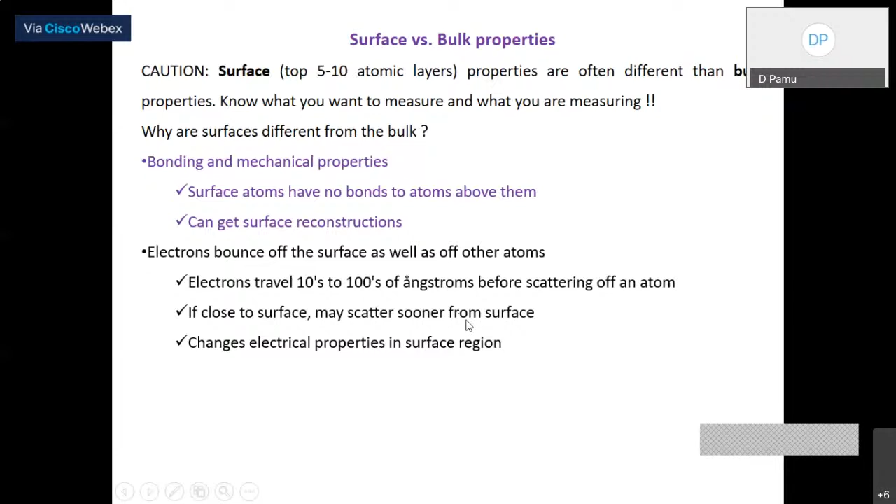Electrons bounce off the surface as well as off other atoms, because they are not properly bonded. Electrons travel tens and hundreds of angstroms before scattering off an atom. If close to the surface, may scatter sooner from the surface, which changes electrical properties at the surface significantly. That is where thin films behave differently from bulk.

The chemistry is different at the surface too. Atoms from bulk may segregate to the surface to minimize free energy, and impurities from the outside environment also come in, so the combination of these works in favor of enhancing the properties. That is what makes the difference - the surface of the thin film and bulk properties are totally different, and as a result you get enhanced properties.

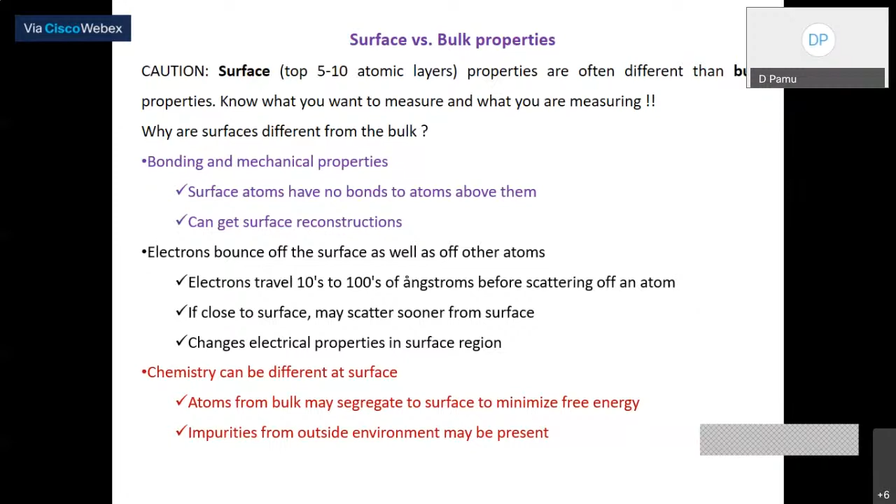I think with that I am done, because I have many things to talk about, but I think this is good enough for what I want to give. So I am open to questions. Thank you.

Question: Can we synthesize pegylated nanoparticles using LPCVD method, with polyethylene glycol? Answer: Definitely. What size you wanted is an important thing. For every CVD method, or every particular method, you have to optimize. I have told you some processing parameters - if you play with them, it is possible to grow controlled particle sizes. It is possible.

Question: How can we calculate the thickness and surface area of the thin film? Answer: For thickness, if I am using a transparent substrate, I can take a transmission spectrum and calculate thickness from that. Or if I am using PVD or thermal evaporation, there is a thickness monitor inside the chamber itself - while depositing the thin film, if you input your material's density and other parameters, you can see the thickness during deposition. Or there is a surface profiler that can measure it.

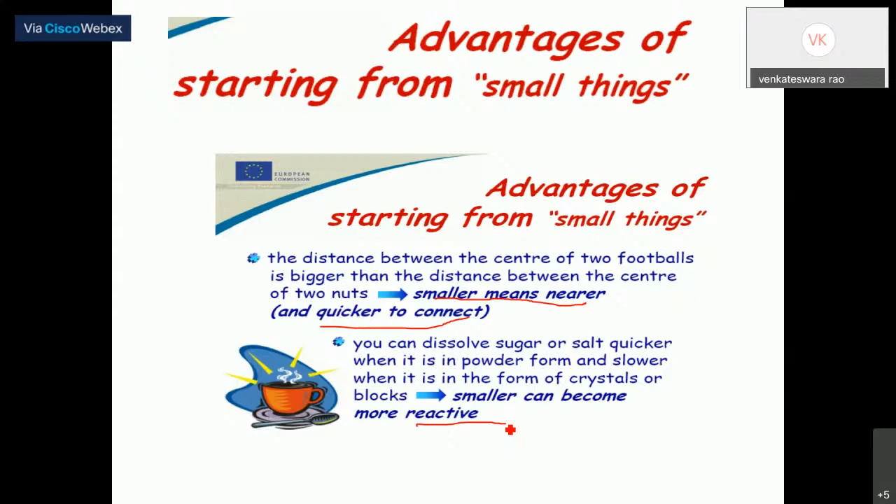Then you may ask, why only nanotechnology? Why not milli technology, that is 10 to the power of -3, or micro technology, 10 to the power of -6? What made us fascinated towards nanotechnology, and not milli and micro - that is the one point we need to clearly understand before talking about nanomaterials and applications.

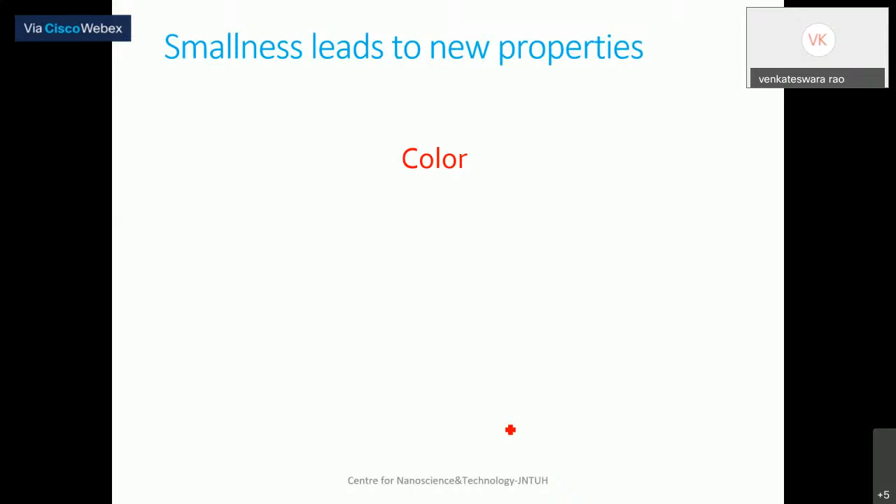Smallness gives a lot of property modifications. Take color modification in the case of gold - you know very well the color of gold, I need not tell you. But if I reduce the size of gold to 50 nanometers, it will become brick red, then blue, then white in color, like water. So what is happening here? Physically, color modification happens when you reduce the size of the gold nanoparticles.

Color modification, melting point - physical properties, the strength of materials, the conductivity, resistivity and other electrical properties. So broadly, physical and chemical properties are going to be modified when you reduce the size of the nanomaterial - reactivity and all these properties are modified. Depending on the application, we need to tailor the materials as per our convenience and requirements. So the basic point here is smallness - smallness makes things better.

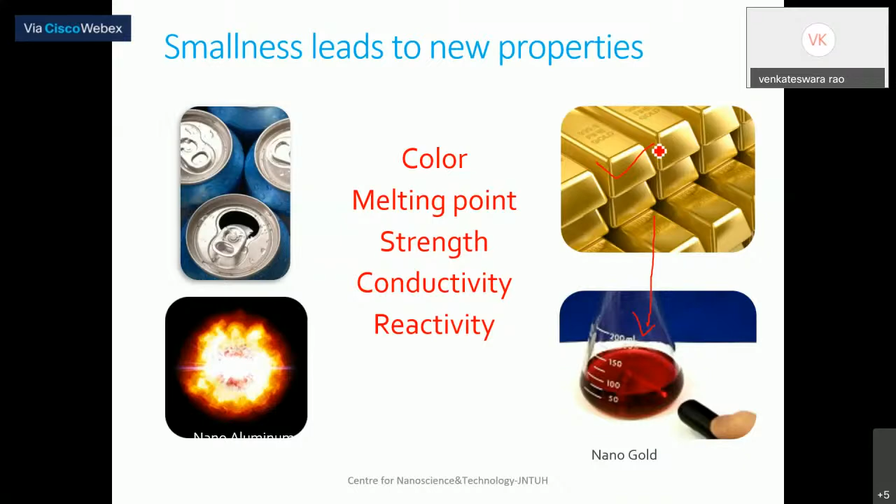Before going into smallness, we need to understand why only nano? Why not 10 to the power of -3 meters or 10 to the power of -6 meters - these are not showing anything great. That's the reason milli and micro technologies were not much worried about, but we just jumped into nanotechnology.

As an example, let's take a simple case to solve this problem. Consider a 100 nanometer diameter particle, spherical in form. The formula for spherical volume is 4 by 3 pi r cube. Since diameter was given, I substituted it and calculated volume as 5.24 into 10 to the power of -22 meter cube. Similarly, I also want to calculate the surface area, which is 4 pi r square.

The formula for sphere surface area is 4 pi r square, or pi d square if converted to diameter d. If I calculate the surface area, that is 3.141 into 10 to the power of minus 14 meters square. This is the surface area, and this is the volume. Now, if I measure surface to volume ratio, surprisingly it will be greater than 10 to the power of 7.

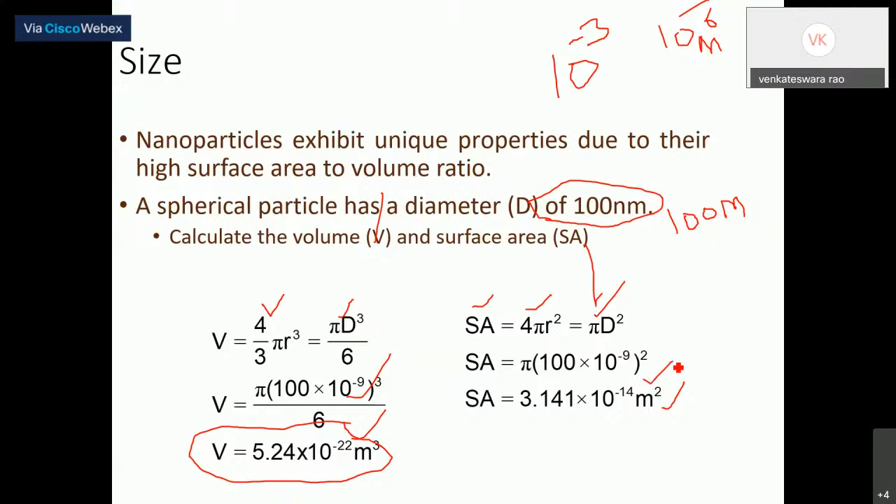I am repeating it once again: the scale matters, the smallness matters. When you take 100 nanometers and determine volume and surface, the volume is 10 to the power of minus 22 at the bottom, and the surface is 10 to the power of minus 14. Then you get plus 10 to the power of 7, meaning the surface to volume ratio is increasing enormously. That happens in the case of nano, which will not happen in the case of meters, milli, or micro. It will happen in milli and micro, but not this predominantly.

So the basic takeaway is: surface to volume ratio increases, and hence the percentage of atoms at the surface becomes more dominant. This is the point we need to understand very clearly when dealing with nanomaterials. Generally, accepted material properties are derived from the bulk, whereas the percentage of atoms at the surface is minimum. That is what I am trying to explain to you.

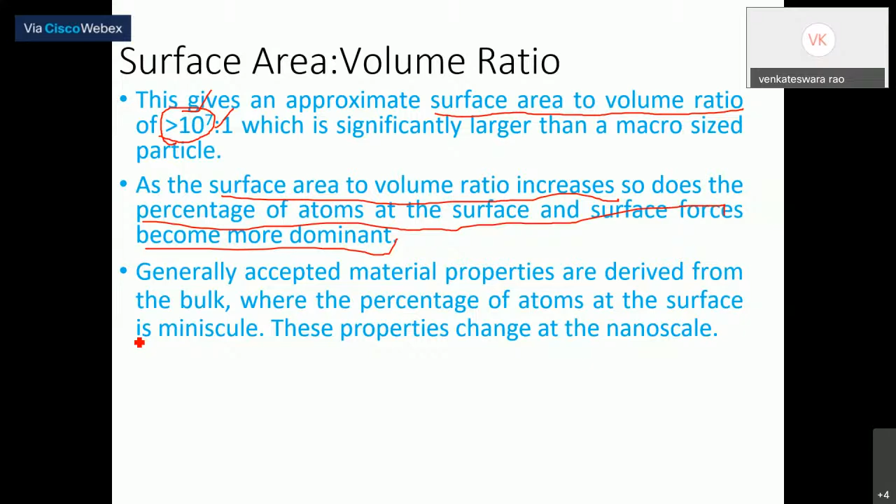In another manner, take another simple example - even you can calculate this. Take a cube whose length, breadth, and size you vary, and find out once again the surface to volume ratio. You will wonder, the surface to volume ratio will be predominantly increasing in the range of nano. I will put it another way: if I cut a 5 cubic centimeter cube into pieces, it will cover almost an entire football ground.

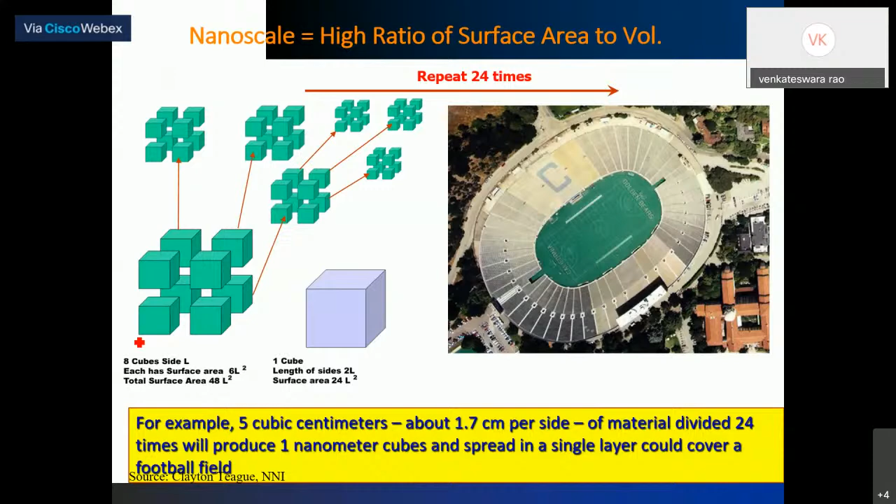The meaning of that is the surface to volume ratio is going to enormously increase in the case of nano, whereas in the case of other things, it is not that much. Another simple way to understand this, without worrying about quantum confinement and other new things, let me take a simple example.